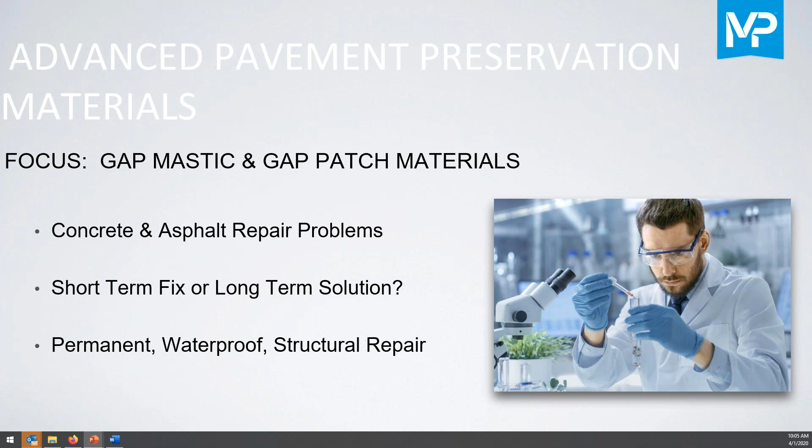That sounds fine. All right, so you can see here on the next slide, we'll talk a little bit about some of the things that the mastic materials do.

I just want to introduce myself. I'm Mike Guyman. I started doing heavy oil and asphalt research back in 1984, and I've been involved in that type of research ever since. About 17 years ago, I started working for Maxwell Products as lead researcher, and about 15 and a half years ago we applied our first beta test for mastic materials. This is one of the most interesting projects I've ever been involved in. I've been developing products for over 35 years, but this is a product I wasn't underwhelmed by - I've been very excited and impressed with the materials. Some of the very first tests we put in 15 and a half years ago are still in place. The first time we did it, we didn't have the right binder, the right aggregate, or the right percentages, but the materials are still there, still doing their job. After hundreds and hundreds of field tests, we now have 15 different products in the mastic patch line. Mark Avery is our Southern California rep, and he'll be helping me with this presentation. Okay, let's go on to the next slide.

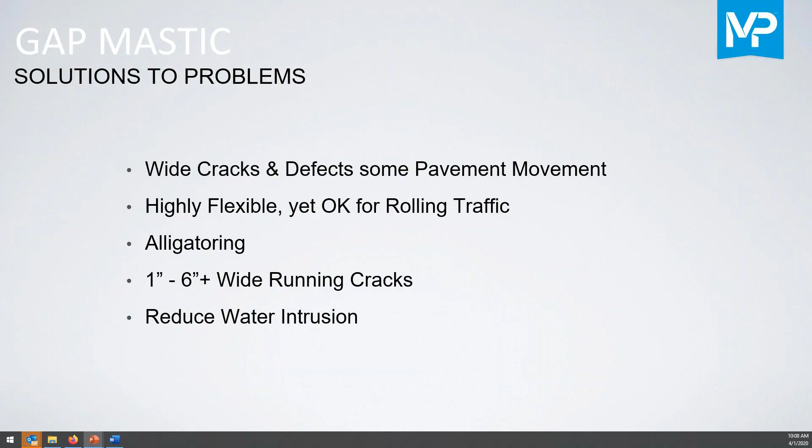Okay, let's see if we still have... it looks like we've lost control again. Let's see, nope, you've got it. Okay, there we go, great. So this just shows a little bit you can read up on the screen. We're going to move through these pretty quick. Let's see, we'll go back. Okay, Mark, you want to tell us a little bit about this? Oh, sorry.

The one you were showing there is in the high desert. Desert's very much a challenge, it has thermal cracks. It goes from low temps, 30 degrees in the morning, to 100 degrees by 1 or 2 p.m. So we need a little bit of flexibility. This is a mastic high temp climate product we call gap mastic, just as a name. The little cart is shown there for being able to jockey around the crazed spiderweb cracking you'll see in the desert.

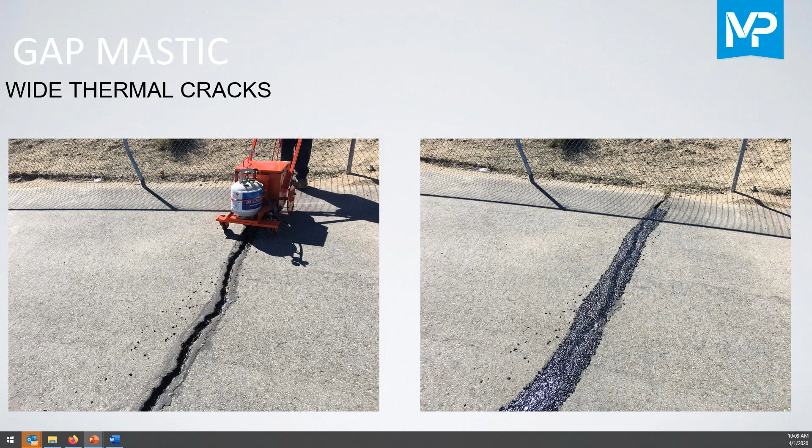This is up in Phelan, California, for anyone who knows where that is. South of Palmdale.

This is an HOA a little bit west of Lake Elsinore, up in the mountains. They had wide thermal cracks, but since they didn't have curb and gutter, they also have alligatoring where it comes to each of the edges. So prior to slurry seal, we coated it with these materials and also filled and sealed the wide thermal cracks. When the slurry came back over it, you can almost not tell where the material was.

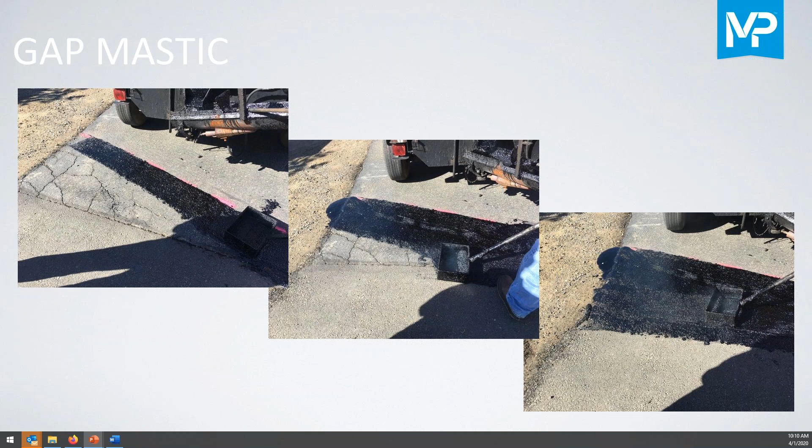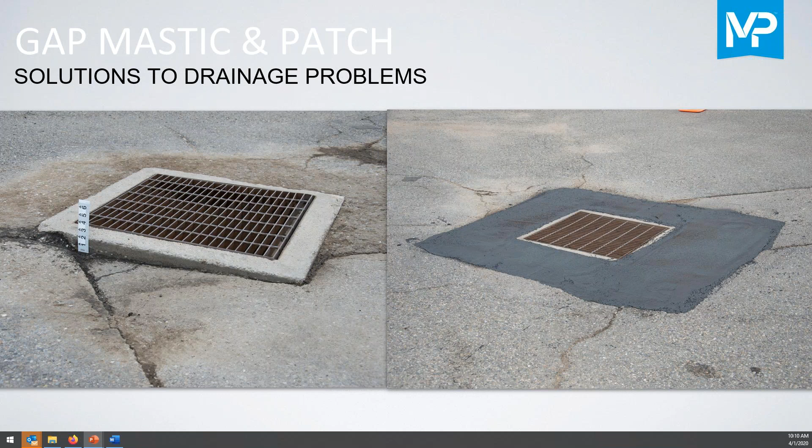So this is another solution. In Minnesota, there are entire crews that spend all summer long doing nothing but this, going from city to city to help with the drainage issues.

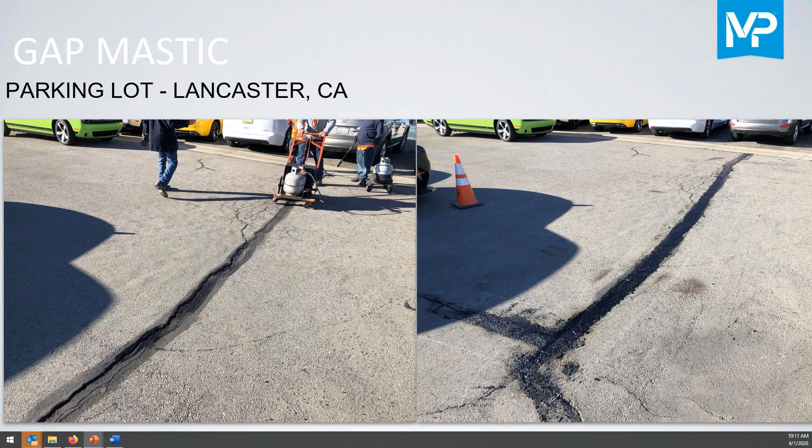Okay Mark, you want to hit this one again? Just another example, it's taking on popularity in the high desert because these types of cracks are just so common. This was in an auto parking lot with the same kind of issue. It was difficult to jockey things around, so we used this smaller device that we filled from the kettle device. It's a remote cart, and it makes for quick filling and sealing of the cracks.

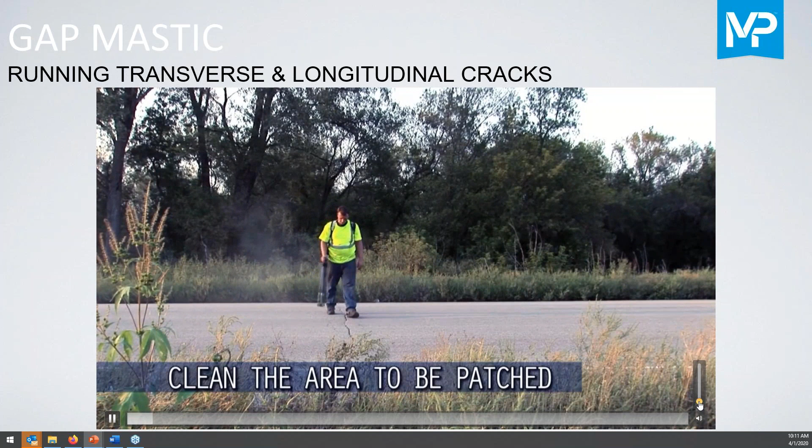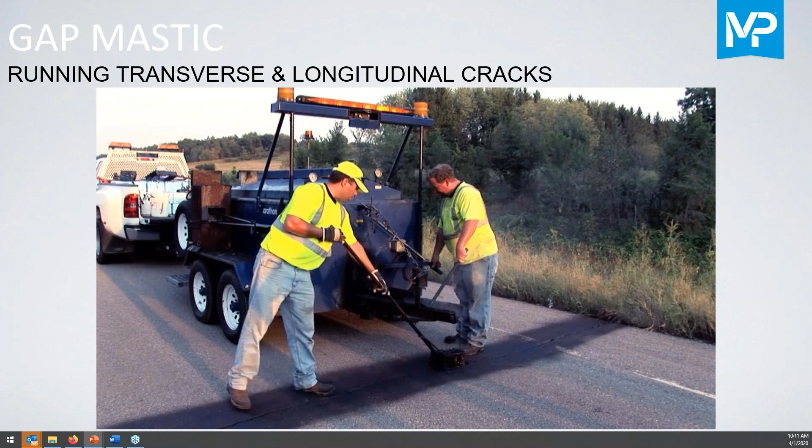Okay, so of course it's important to clean off the crack. This is thermal cracking in Minnesota. This is the main contractor, they put down 20 or 30 truckloads of material a year. First they cleaned it, then they primed it, then they'll do an original pass with 12 inches. The idea behind this is to create a flexible joint in the pavement, and then they'll come back through with a bigger box to level the road.

One thing Mike could address - we want to prime 100% of concrete. Can you tell why we would prime asphalt, or why in some cases we wouldn't need to? So we have a primer that we use in most places, but we can't use that in California. We've gone to emulsions from Reed and Graham and several other manufacturers that Mark can fill us in on, where we prime first. The reason why we do this is for a water barrier in case water comes up back in around the fix. There are a lot of places where we don't use primer, but if you have water issues at all, we definitely recommend primer.

Okay, so they're doing the second pass over it. There's been a lot of work in Minnesota with ride quality, and our materials have been right in the middle among other manufacturers with that research.

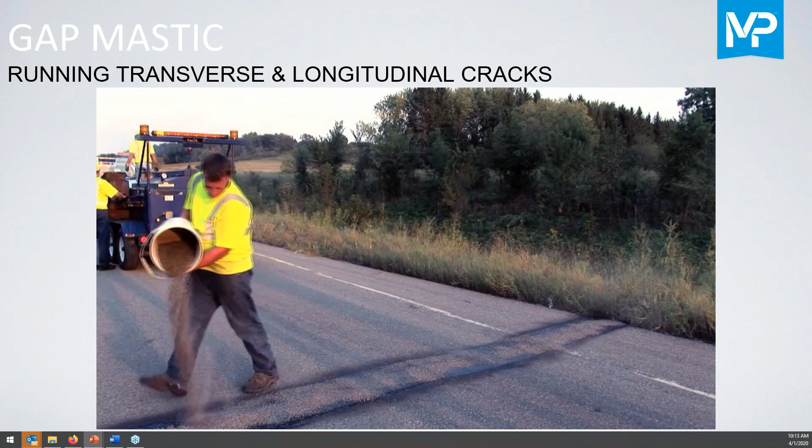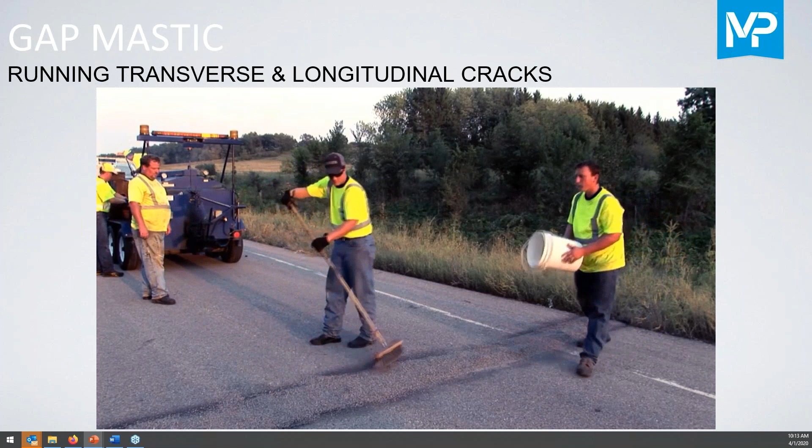And then topping stone is really great. If you're fixing big wide areas, it's really nice to get a little bit of friction on the top of the material, and it also sets up a little quicker for traffic. Mike, you can let them know also that it's not slippery without the topping stone. That's correct, maybe even cite the NCAT test. Yes, we've done a number of tests with friction with NCAT, so we have some friction numbers we can share with anybody who's interested. But if you're fixing big wide areas, that's where we're most concerned with that.

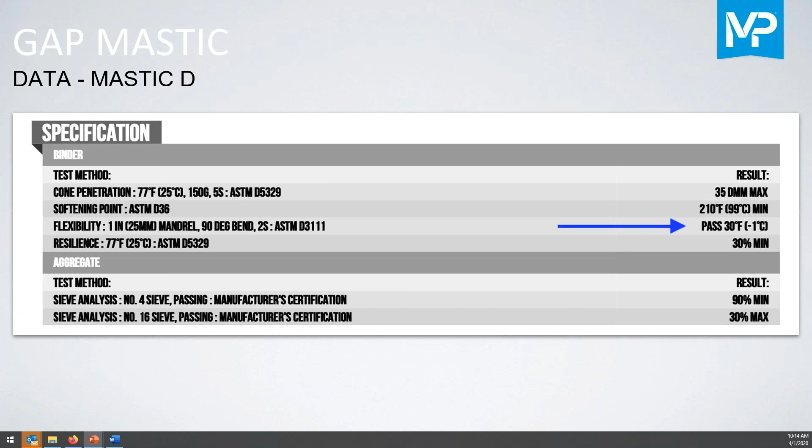So anyway, here's a specification for our gap mastic D material. This is a material that's designed for the Southern California area, and you can see we have specifications that relate to both the warm temperatures your material is going to experience, and also the colder temperatures. We also have a little bit of information about our aggregates - just so you know these are very, very specialized aggregates that we use in all of our products, meant to maximize friction and also to be suspended so that there are rocks near the surface of the product.

Let's go down. All right, any questions so far? I see one that's popped up from Sarah Chavez. She says, what's the difference between mastic and crack seal?

It's more structural. I remember one of the first years I was with Maxwell Products, somebody spread our ASTM D6690 Type 2 material all over the road, and they had issues with motorcycles slipping on it and all kinds of problems. One of the things about mastic is that you can spread the material all over the road in big wide areas safely. That's probably the biggest difference.

That's the only question we have in the queue. I don't know if anybody's typing like mad or has all their questions answered. We've touched on mastics first, and then we're going to move into patching materials, which is a more robust version of mastic. So this seemed like a good place to stop.

Let me just insert one more comment on that. After I had been with the company for a few months, I could already see a lot of repairs that I could not do with crack sealant. That's the reason why we developed our mastic materials, and then we refined those materials. We currently have 15 different products for different climates and situations, and each one has a specific thing it does to resolve issues quickly and semi-permanently for these repairs. When I got to the point where I could see our mastic materials could not repair some things, we started working on the patching materials, which can fix even more defects.

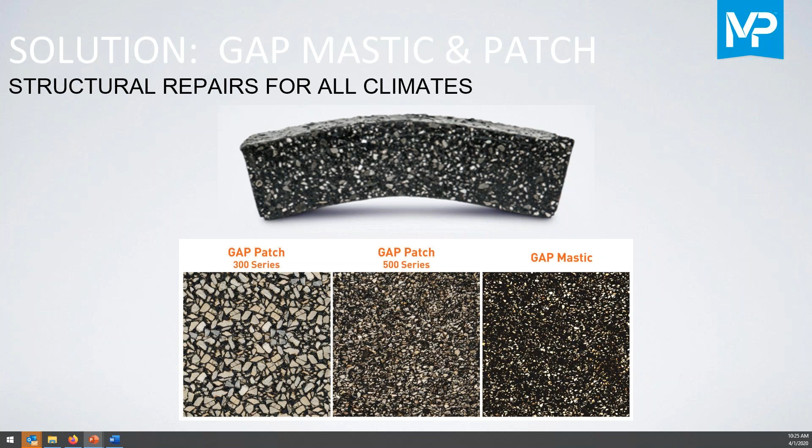Okay, so these are some of the things that we can do with the patching materials. We can actually go to full depth repairs. I have made repairs that were up to 11 inches deep, with extremely intense truck traffic.

We have some of our materials placed in the truck lane on several of your freeway systems. We'll show you a little bit about that later on, and it's been down for quite some time. I know the very first materials we put down were out on I-10 in the truck lane, and they were in place until they replaced the concrete slabs on the road.

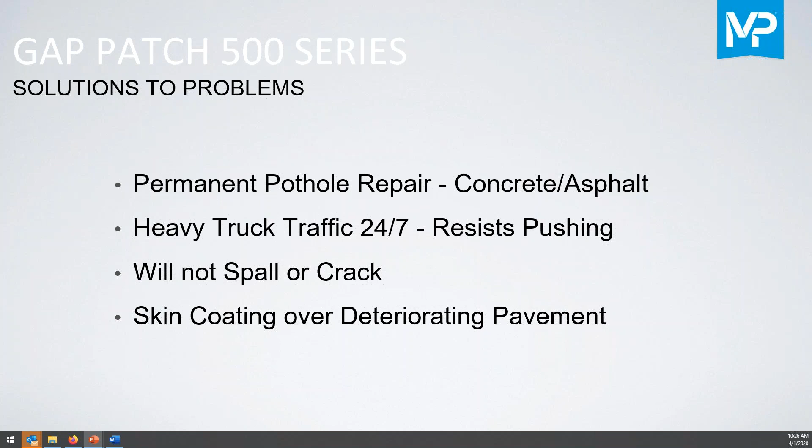It's very interesting with these patching materials. Our patching materials are actually less likely to crack than sealant. It's really an interesting situation, and of course, skin coating over deteriorated pavement. We'll show you some pictures.

Okay Mark, you want to take over for this one? So we realize you're an asphalt association, but as Brandon and I talked about yesterday, a lot of times we put asphalt over concrete because it has lots of problems. So we just want to let you know that it can handle concrete or asphalt.

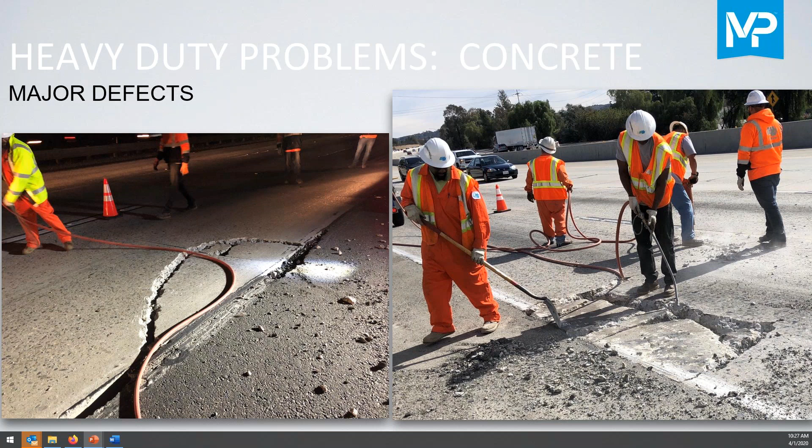The one on the left is on 210 in San Bernardino, and the one on the right is on I-10 in Redlands. If you scroll through, next slide, the left one is the 210 one complete - it was an emergency repair. There were 5 or 6 distressed areas like this. Something caused a motorcycle to tumble down, and they did an emergency repair using the material because it can get traffic on so quickly. The right one is just the finished Redlands one.

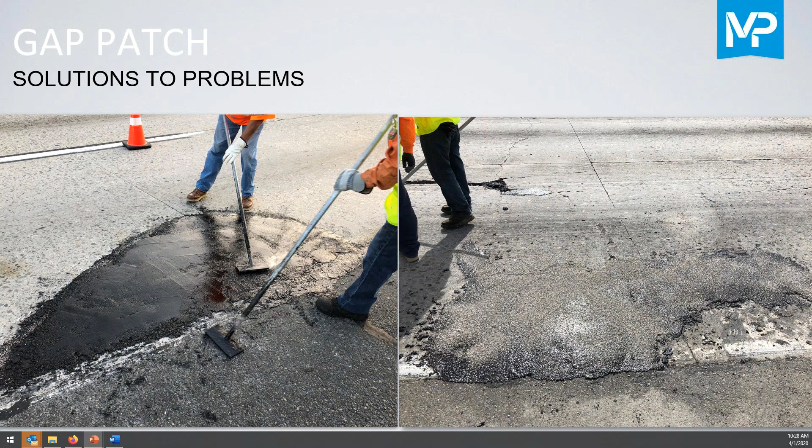The material, all of our materials, were originally designed for asphalt pavements, but then some of our customers started using them on concrete surfaces, so we went back and did some additional modifications to the materials, and also did a lot of research to make sure the materials would work in both substrates. The other thing too is obviously the freeways - it's more of a proving ground because it gets so much truck traffic.

So we're going to get the concrete pictures out of the way first. This is another one - Mark, you can tell them where that is. That's on I-15 going into San Bernardino, between Sierra and Summit.

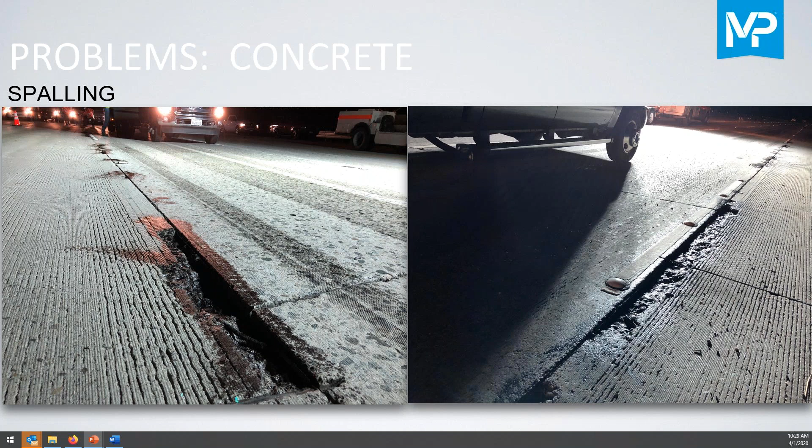The pictures are on the northbound side, but they repaired over 300 spalls like this in 3 days, using 6 pallets of material. They were going to use fast patch, but the superintendent decided to try our material because he was concerned the fast patch might actually pop out. So he was very happy with it.

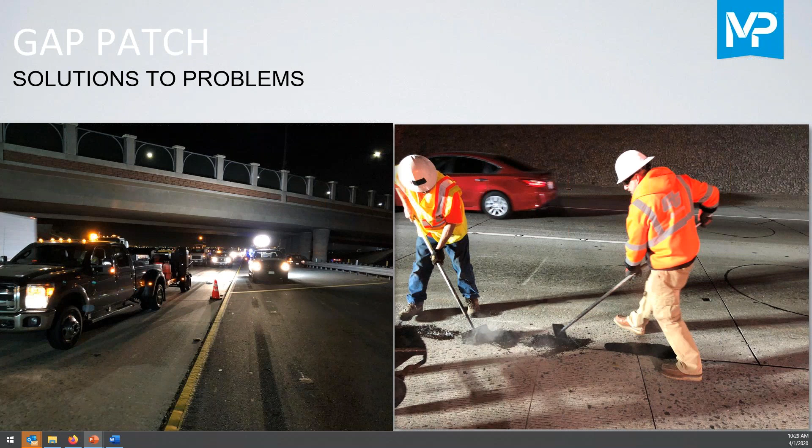And this is just some pictures of the situation, and the angry people backed up in traffic in the middle of the night. Okay, so you can see one of the melters.

This is a double boiler melter, so you're heating oil, which heats our product. In each of the boxes, we have a weight amount of binder and sealant. So each one of those boxes is a mini kit, if you will, for patching.

For every one of those boxes that you throw in the kettle, about 3.5 gallons of material will come out the back. You can also see in this particular unit there is an auger system in the back, and this is essential for the 500 series patch materials.

We can basically put an entire pallet of material out of this kettle in less than 9 minutes.

Okay, so... okay, so you want to talk about this, Mark, just a little bit?

Sure. This is a recent one done in District 7. This is a 210 truck connector going northbound to I-5 in Sylmar, and they had, I think, a couple different products that were failing, popping out.

I won't tell them the competitors' names or anything like that, but I wanted to show you the flexibility of this stuff - that this is going around rocker panels.

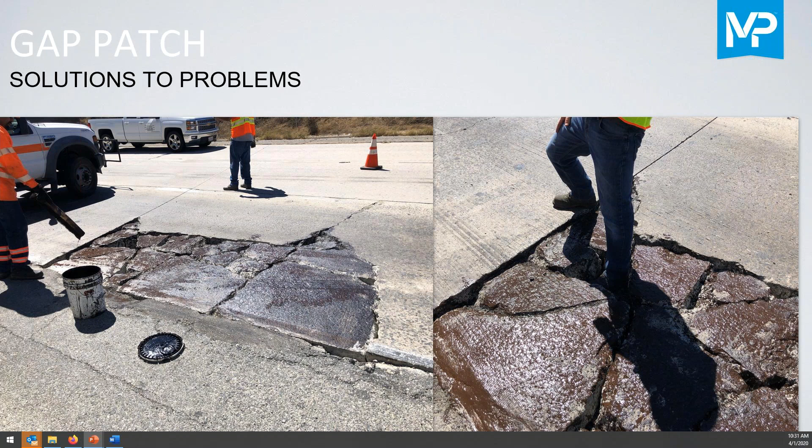We'll show another one in a video later. This lane is where the trucks split off, this truck only lane, and we were counting anywhere from 2 trucks on the low side to 8 trucks per minute hitting this, 24 hours a day. It's amazing what you guys have to do to maintain freeways.

But I just spoke recently to a couple of the people that have been watching this, and they're very happy with the results. It's really interesting to me - we discovered something very interesting about these materials, and it kind of relates to all mastics: the higher the traffic load, it actually kind of works the material and makes it even work better.

It's kind of a strange situation, but if we're going to have an issue with some of our mastic materials, usually it's on roads that don't have a lot of traffic.

Okay, so we're going to see if I can get this next. Let's see, it's not responding. Oh, there we go. Oh, no. I don't know what happened with that exactly. So we're going to try to play a video for you if we can get it to work. Go back 2, Mike, and then forward 1. Okay. It's not responding. I got it, Mike. Okay.

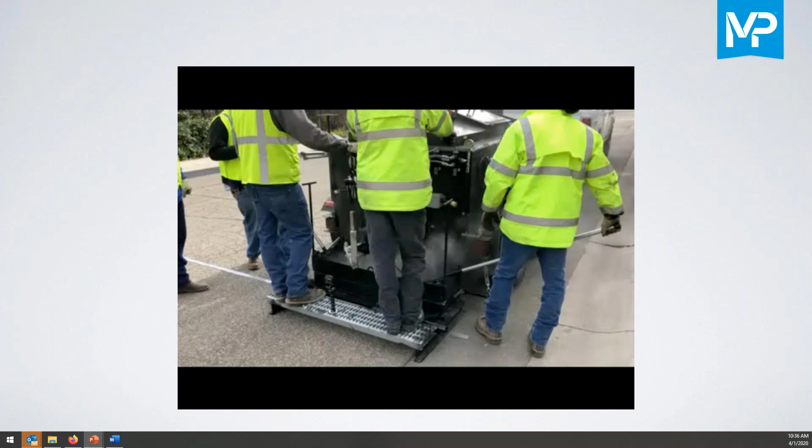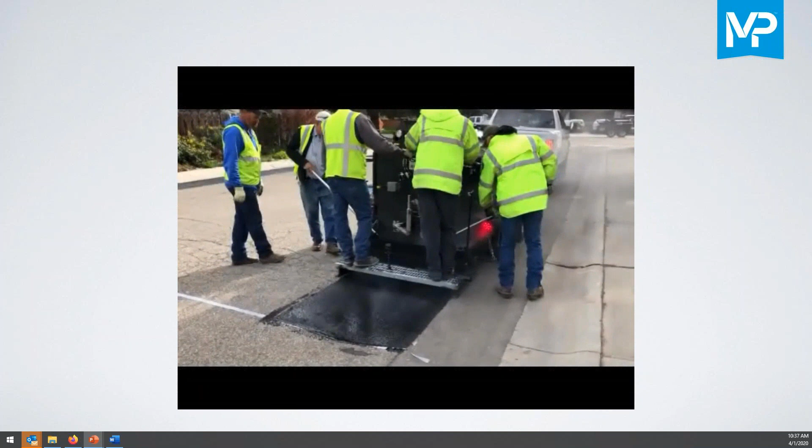They were about to rip this road out, and they wanted to see if they could put an interlayer over the alligatoring and see if that would keep the cracks from coming up through the chip seal. And it actually has done that now for 2 winters. This is in Boise, Idaho, and they really liked it a lot.

So this might be something you could do as opposed to taking 4 days and tearing out the whole road. This took us about 4 hours to repair this section.

Okay Mark, you want to hit this one? This is in Lake Elsinore City. Yeah, it's a popular frontage road if you're down in the I-15 area by Lake Elsinore. And we were doing a side-by-side. A competitor had used some of their mastic on the opposite side, and Lake Elsinore City wanted to try our 570 material, and they were very happy, very pleased with it.

It sealed and also leveled out the rut in one pull. How long has that been down for now, Mark? Oh boy, I want to say it'd be coming up on 2 years in June.

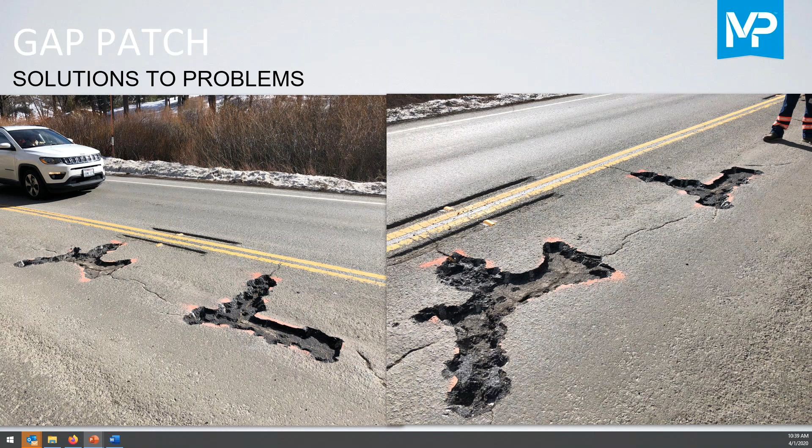All right, you want to hit this one too? So you were talking about La Quinta. This is an HOA in La Quinta. I've been talking with an engineer who actually lives in this La Quinta HOA, and he really wanted to try gap mastic. I began talking to Mike about the high temps out there - they'd seen records of 123 before, and we were concerned because most HOAs have a lot of construction, a lot of trucks parking on the streets, and of course garbage trucks.

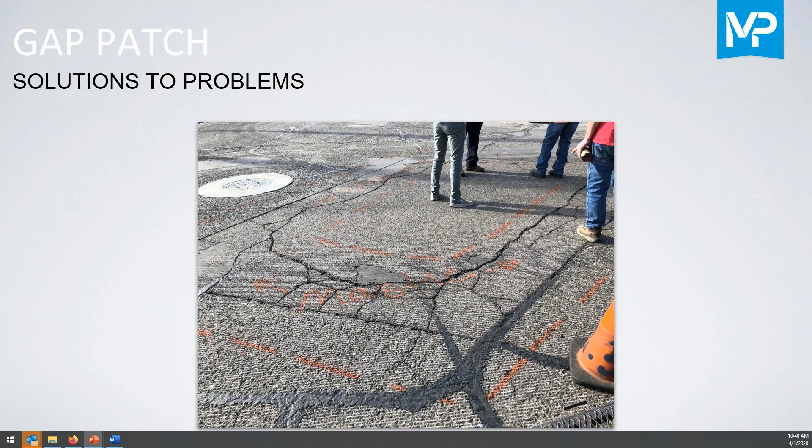We were concerned that the mastic might leave a tire track if it was 120 out.

So this was the first time that I was involved in Southern California with a skin coating of the 570 material rather than a mastic. That area previously would have been R&R, of course, and then they coated it with type 2 slurry. I think it was 6 weeks later, and there's no visible telescoping up. You'll see fine micro cracks around the edges of the patched areas, but nothing deep where water can intrude in. Even the HOA people, who become experts in asphalt and crack seal, are out there with their microscopes, and they really like the results.

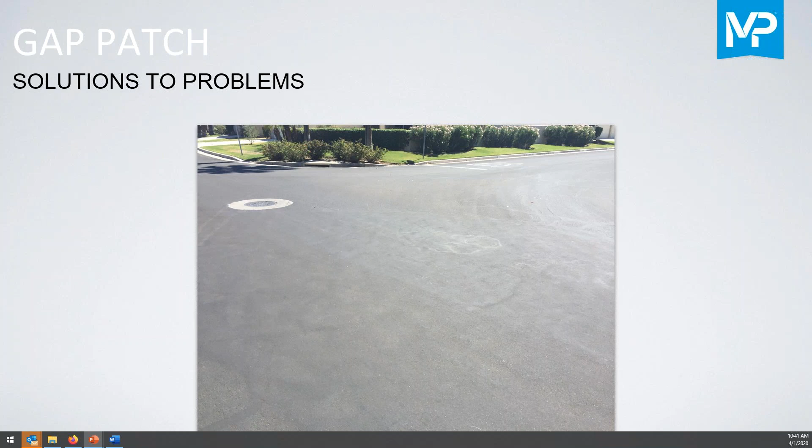So Mark, I couldn't hear the last things that you said, but I was here with Mark the year after it was applied, and the trucks hadn't left very many marks in the material. It looked pretty decent to me.

The Gap Patch 570 was designed for Southern California, and it has been, how long, Mark? Has it been 3 years since the first beta test that we put down here in Southern California? I want to say maybe 3, maybe 2.5, actually.

Time flies. What we've discovered though is that one size doesn't fit all. You really need to design materials for the application that you have to do if you want them to perform well. The 550 material and the 570 materials, I know that we were able to apply over 200 test batches of material before we actually released the 550 on its first beta test.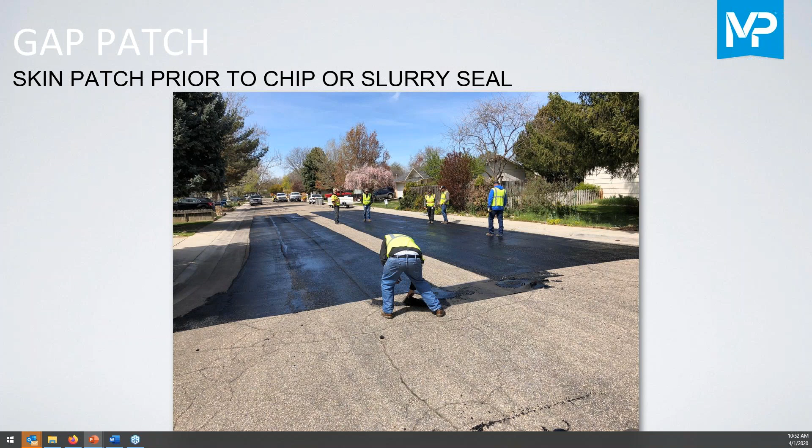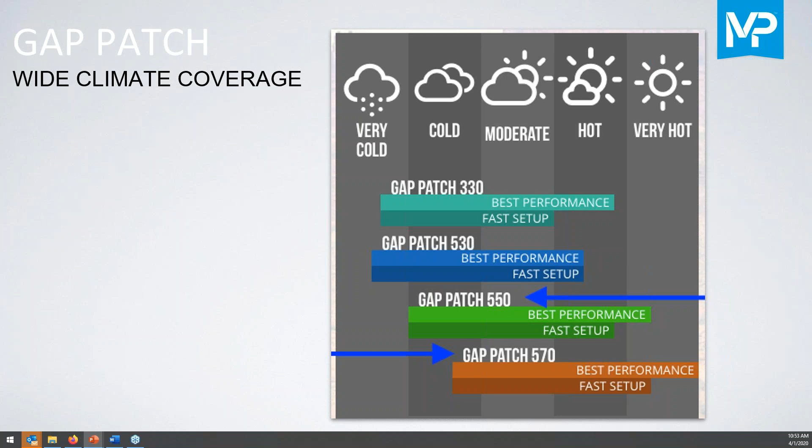I was going to share—let's see if I have a timeline of some of these items. One thing to elaborate on what she was asking a few minutes ago: in the past 4 years since we started releasing our patching materials of the 500 series, we have had company-wide less than 5% failure of those products.

If there has been any failure, normally it's because of underground water pressure coming up underneath the materials, which is another good reason to apply a primer, because it creates a water barrier. If water comes back in around the material through the pavement, you have something to keep it from making the materials release from hydraulic pressure.

Mike, did you want to finish out the one story at NCAT with that, because it's similar to what you were just talking about with water pumping up from below, and what NCAT is doing, and Buzz Powell's reaction is a nice thing. Oh, absolutely.

So a number of years ago, we were giving a presentation in North Dakota. We met Buzz Powell from NCAT. He had some issues on the test track, in particular on Lee Road 151. If there's a big defect in the middle of his road, and these big quarry trucks hit the defect, they will bounce for a number of feet down the road and affect his other test sections.

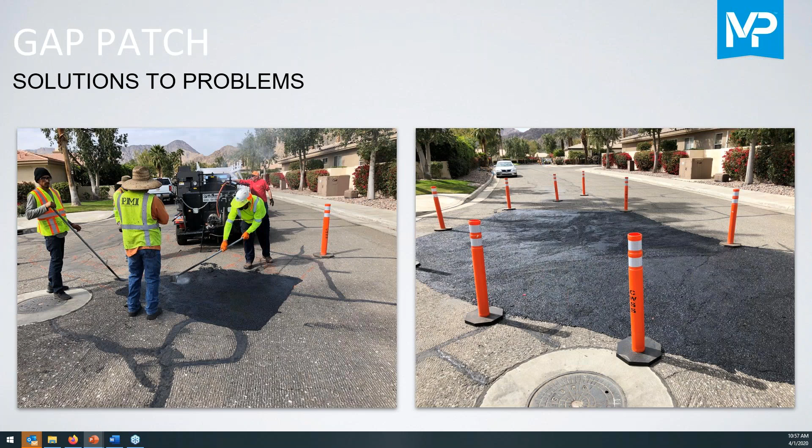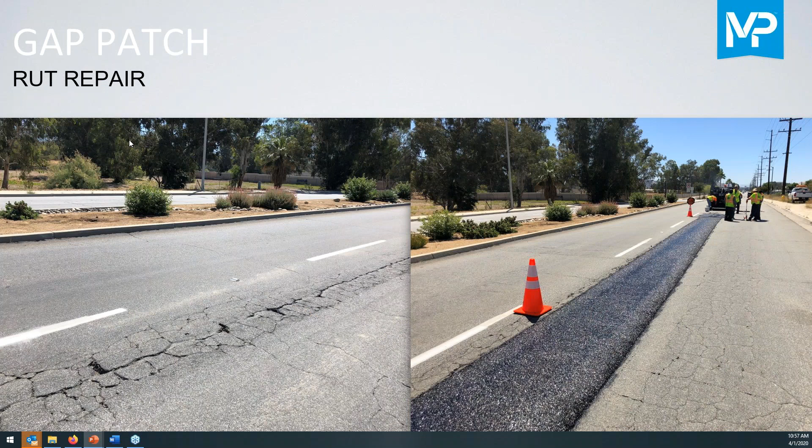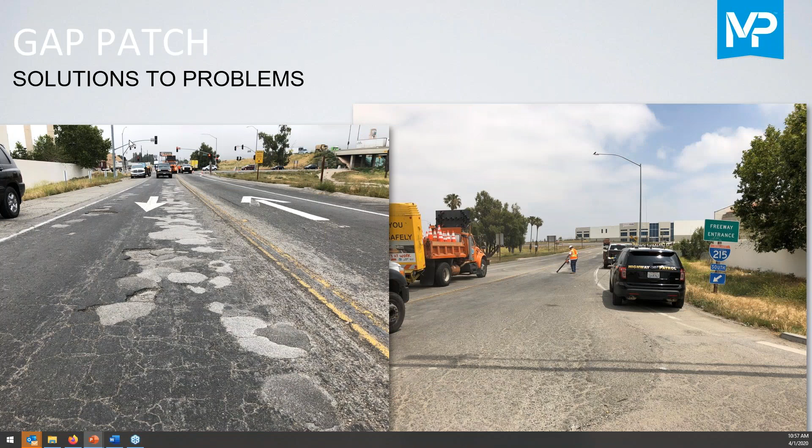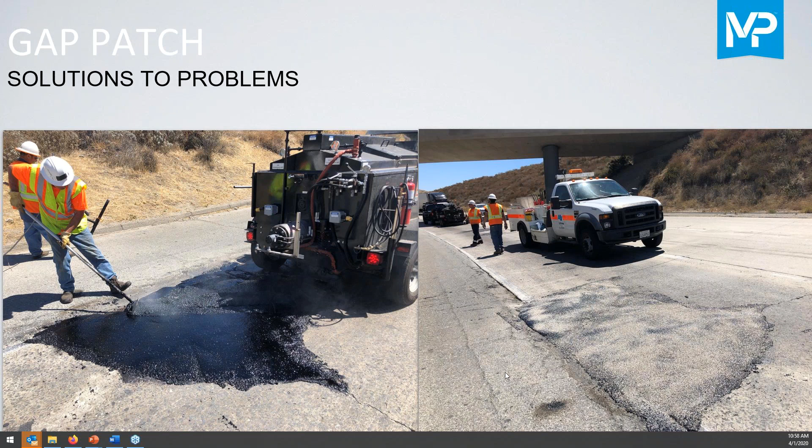The boxes that we sell the material in are expanded polystyrene, and they are structural. They're built like Legos, and I don't know if, oh, there we go.

Darn, we shouldn't have touched it. Okay, I got it, Mike. You got it? Okay. So this will answer his questions. It's this one? Okay. Yes, that's the one. Yes. Yeah, that's the one.

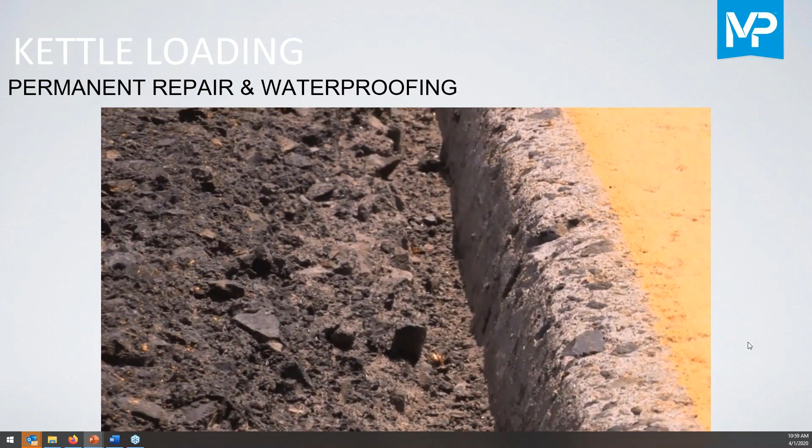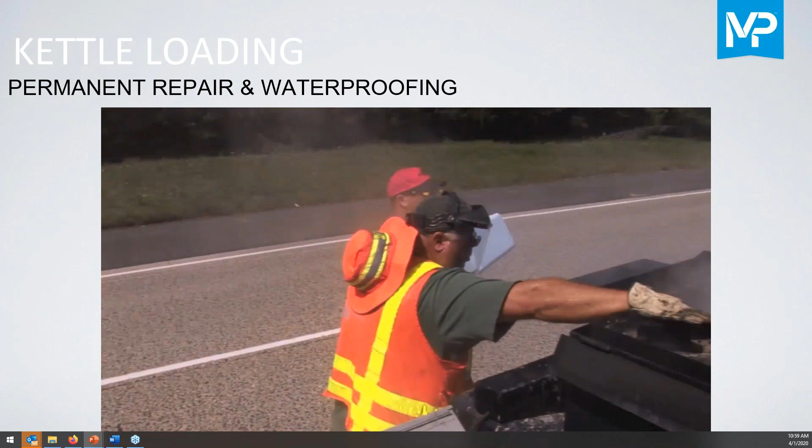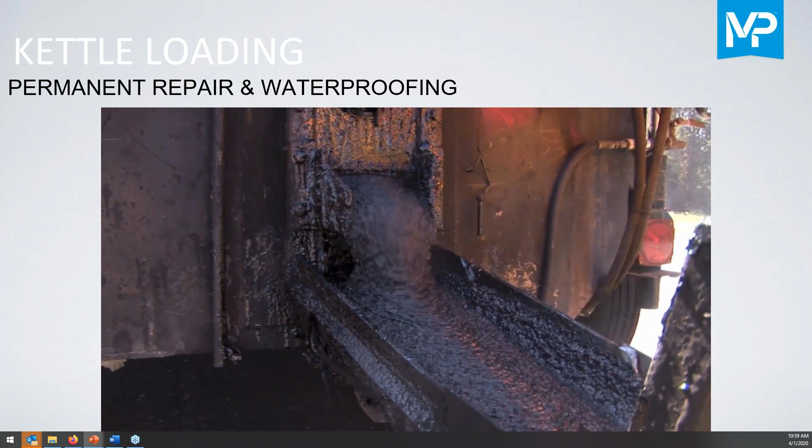So this was the repair in Oregon, the shoulder repair. You can kind of see what it looks like. So this is how the materials come, in pallets like that, and we don't recommend that you throw the material right on top like that, but we usually have you put it on a lid and then put it in. But basically that block of material gets melted in a matter of minutes, and this is the repair they did for about 30 miles over the top of this road.

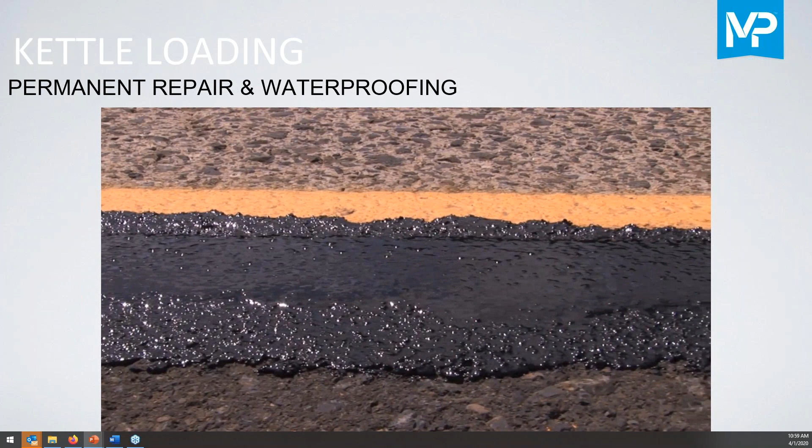So I hope that answers your question. It comes in blocks from us in Salt Lake, and I think Mark has a warehouse. Yeah, in Mira Loma, and there's also one up in Sacramento for California people.

Paul has another follow-up question. Do you offer smaller blocks for quicker meltdown time? Not at this time, but we are considering it.

It's, you know, it does. That probably is the hardest thing that we do, is to melt the blocks. It takes about 2.5 hours to melt a kettle full of material, but then as the day progresses, we can just add blocks and let the kettle recover for 5 minutes. Or sometimes we'll pull the kettle all the way down to the shaft, basically half, and then fill up the kettle again and let it recover for 30 minutes, and then go again. So that is a little bit of a challenge, but I myself, not anyone else helping me, I've put down 4,000 pounds of material in a day.

Another question just popped in here from Sarah: are there authorized contractors, or can any contractor buy and apply?